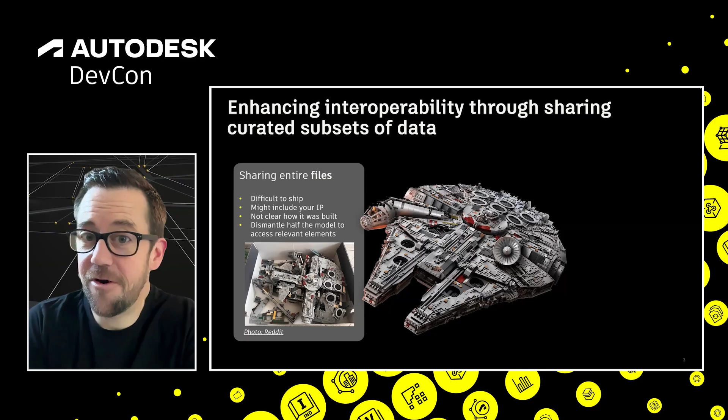What if you could share only the elements that the recipient needs, while maintaining a connection back to the original model, so that you can update the shared subset if something changes on your side? This is how the data exchange system works, allowing you to extract only a portion of your model using granular data structures instead of a file format.

Starting from your authoring app, where you have the entire model, you can isolate, extract, and share model subsets as data exchanges. These exchanges are accessed through the Autodesk Construction Cloud, also known as Forma, so that your existing project permissions and team setups all still apply. Now you have structured granular data that can be used for coordination, documentation, and visualization in BI dashboards.

This is a pretty simple diagram, but this sharing pattern scales to many of the apps that you get to use every day. So by sharing data instead of files, we unlock new and exciting customer value. You can connect to an ecosystem of different tools, extending well beyond just Autodesk tools, while maintaining explicit control over access and permissions established in your Forma data management.

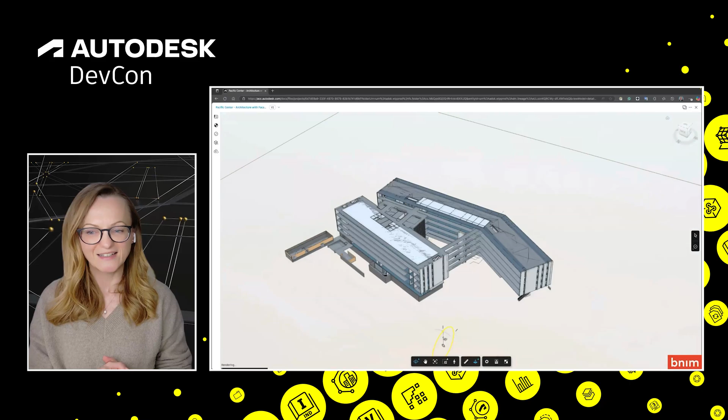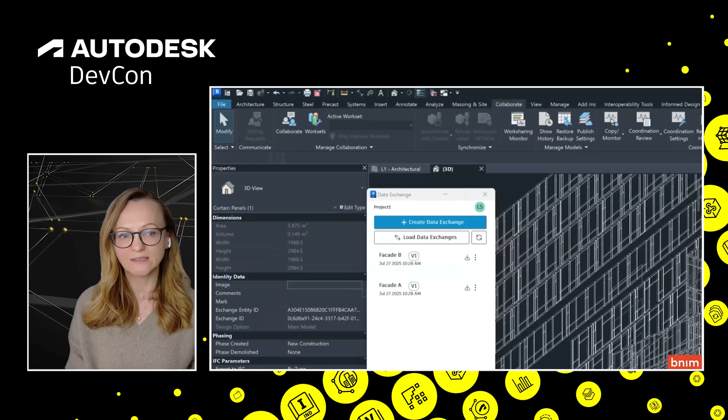I think we have all already received huge IFC files which basically contain everything you don't really need. So in this case, for example, I maybe just need the curtain walls inside of my Revit project. What the IFC Connector allows me is to easily filter the IFC and share only the curtain walls with my Revit and load them there. As you can see, the curtain walls are loaded as curtain walls inside of Revit, which means I'm able to use them for documentation and also for scheduling.

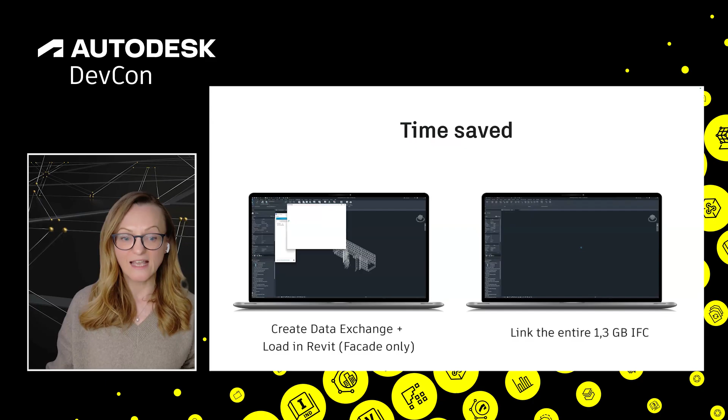As you can imagine, this can save a lot of time because we don't need to link the IFC with all the unnecessary details. And we will also update the data exchange whenever a new version of the IFC file is uploaded. And to show you a little bit how our customers are actually using this connector, let me show you a couple of great real-world examples.

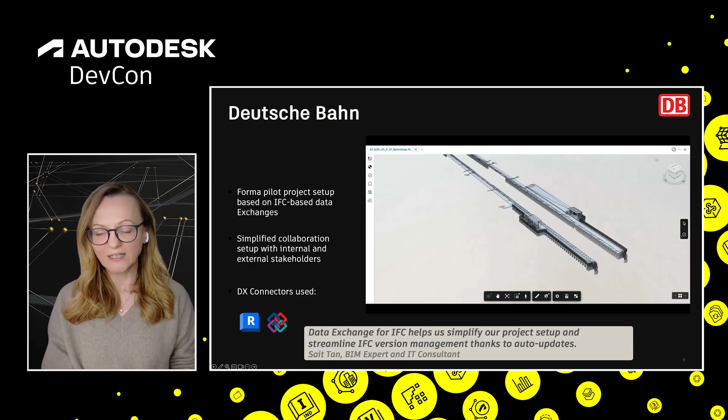So Deutsche Bahn, for example, is an early adopter of our Revit and IFC connectors. Their projects are managed on Forma, and they typically involve multiple teams with complex permission settings. To simplify the project setup and IFC version management, the uploaded files are converted into data exchanges and then used for documentation workflows inside of Revit, and are also visible across all the views of the published Revit model later on Forma. In addition, all the properties from the IFC files are preserved and seamlessly transferred to Revit through the data exchange, so they are able to use them for documentation, scheduling, tagging, and so on.

Another great example we have received from Skanska UK is showing the Power BI workflow, which allows them to validate IFC 4.3 model exports from Revit in a very easy and straightforward way, while visualizing the data coming from the IFC files in Power BI. Our Power BI viewer or connector allows you to load the data exchanges no matter from which connector, and with the viewer, which is part of the connector, you can easily create interactive Power BI dashboards, which can then be shared with anyone, even stakeholders who otherwise don't have the BIM skills or the right tools to work with this data and analyze it.

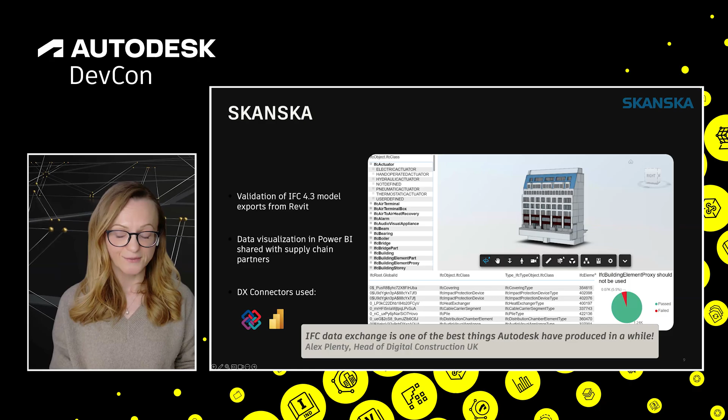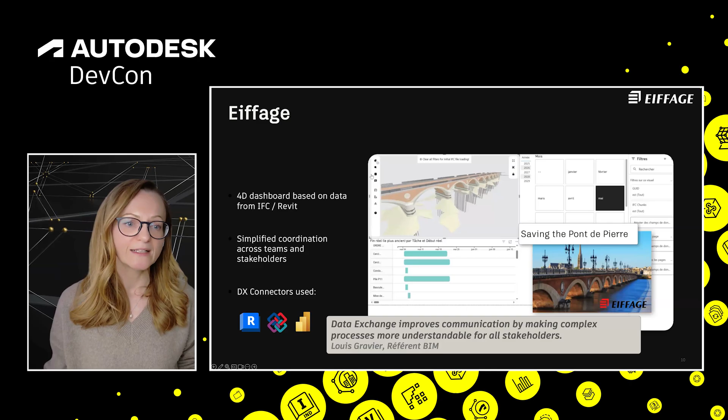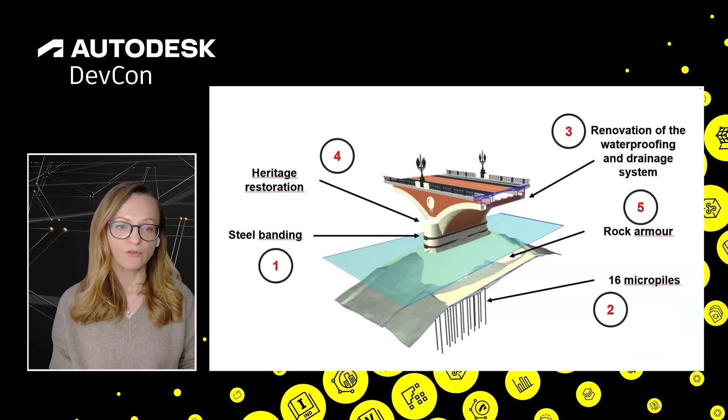Last but not least, another very exciting project is this reconstruction project shared by the French construction company Eiffage, who have built a 4D dashboard based on data exchanges. They basically had a challenge that this reconstruction was very complex and involved several stages, and most of the staff on site was not really familiar with BIM tools or able to use very complex project dashboards, which is why they built this Power BI dashboard, which would run simply in a web browser, and which connected the models coming from both IFC and Revit with the project schedule. This allowed everyone to easily check which work needed to be done on a specific day and where, and they would also get immediate feedback in the viewer as well.

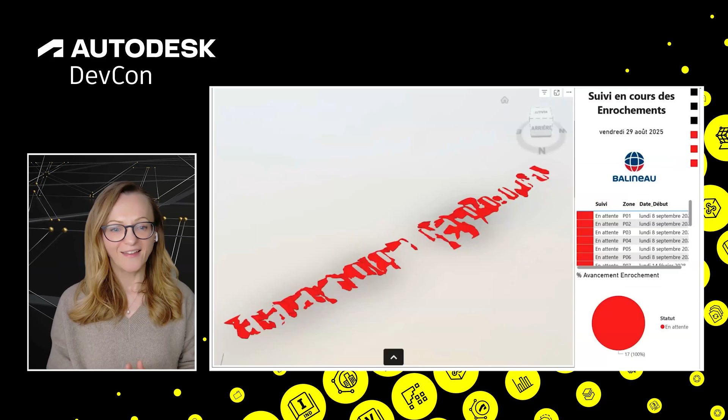I hope these nice customer examples have inspired you to try out our Cloud Connector for IFC. We also have a dedicated link list where you can get a lot of other resources. We also have a webinar series on data exchange, and you can find all the recordings in the link list, and a lot of other great materials. So definitely stay in touch, and thank you for using Data Exchange.